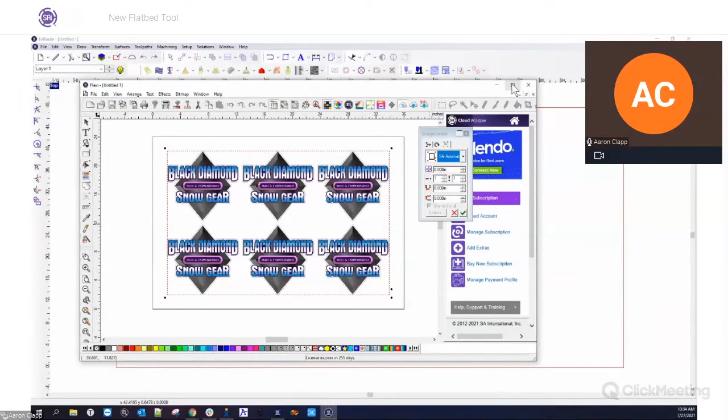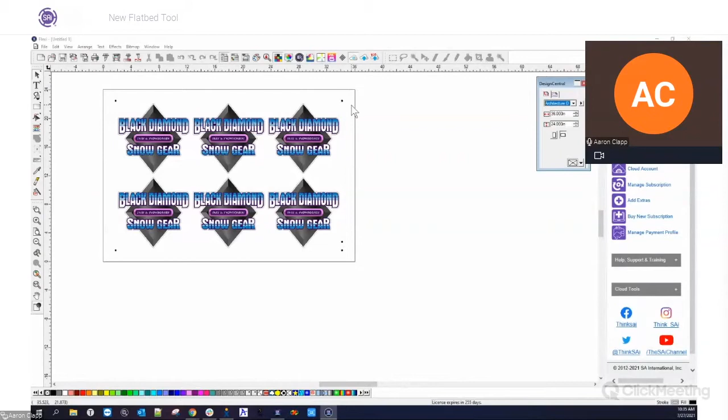Okay, so basically what we're going to start with is I'm actually going to open up Flexi just to give a perspective of what the file is going to look like before we import this in. Now, this doesn't have to be made inside of Flexi — it could be made in Illustrator, CorelDRAW, or any other application that has the ability to apply registration marks or circles or whatever. So basically the premise here is that I've imported a job, a basic sign, nothing special. It's all vector, and what we've done here is create a contour cut around it, indicated by this gray line here.

So I'm going to print this out, and then it's going to go to cut, and I'm going to cut this on my machine. The cut line is basically going to be this gray line here. And then what I've done is I've added some registration marks.

Now in Flexi, you have the ability to create automatic registration marks, little circles. This is a great way to do this. You do not have to have this particular tool. You could just be in Illustrator and draw circles. Just as long as they're a consistent diameter, we are good.

So for example, if you want to make them 0.25 inches, 0.5 inches, whatever you want them to be, the base amount is you need to have at least 3 registration marks. Minimum is on the perimeter, and then if you want to intersperse them throughout the design, that would be perfectly fine.

In fact, let's take a look at EnRoute real quick, and we'll just import a job that has a lot of them. So this particular job here has these sets of marks here, here, and here, but then it also has individual marks all throughout the file. So this is kind of up to you as to how many you need or want, but at least 3 is the minimum for this kind of workflow.

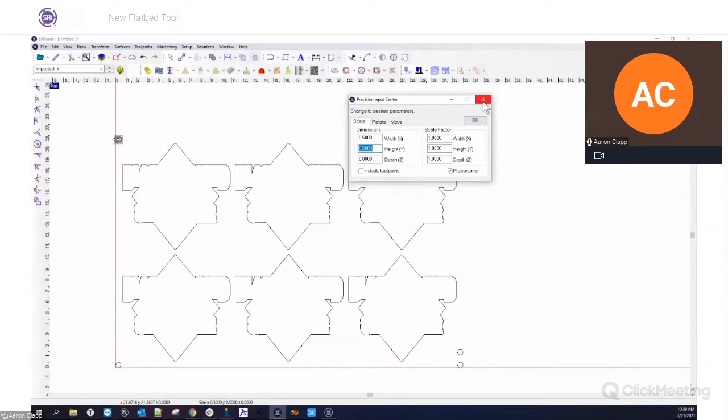And I'm just going to take note of my fiducial size. So here in this case, our fiducial size is 0.5 inches in diameter. So we're good there. I'm going to go ahead and close that. I'm going to select everything, and I'm going to go to Transform, Distort, and Flatbed Distortion.

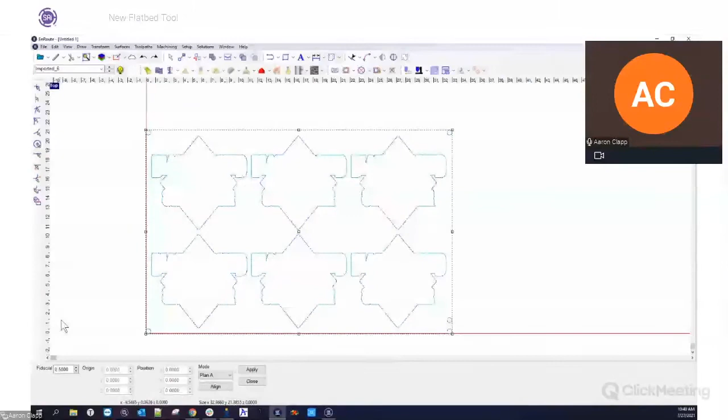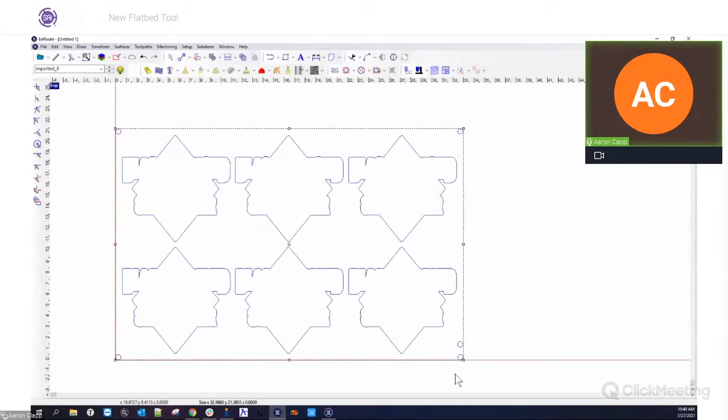Okay, so let's just make sure that our settings are right here. So we set our settings at 0.5, and it should recognize these holes, and for some reason it's not. Let's grab this real quick and delete it, and we'll just re-import the file here.

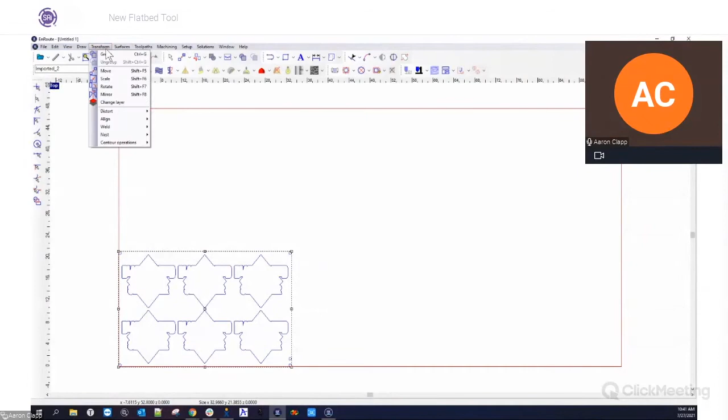All right, distort, flatbed distortion. Okay, and for some reason it's not giving me... let's move our part away from the edge here.

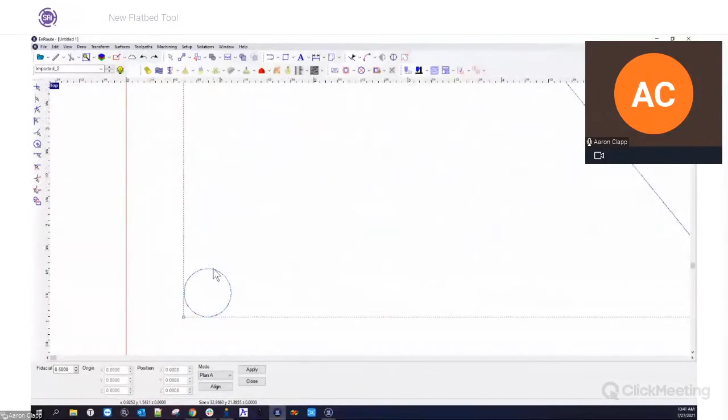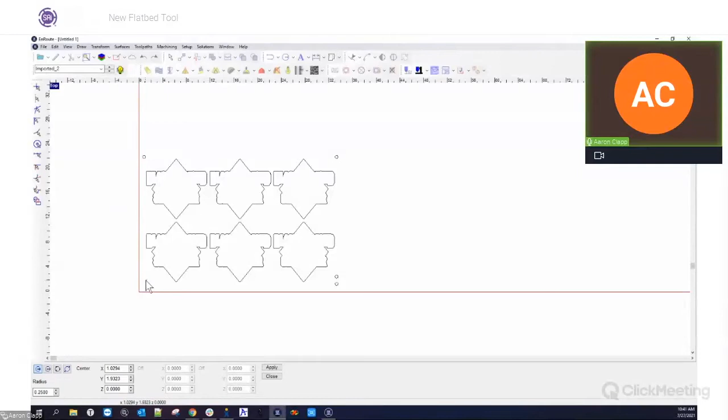So basically what it should do is give us fiducials right here. Now, I might have done something here. So for the sake of our demonstration, I'm just going to replace these. For some reason this file was working earlier, and now all of a sudden it's not. So just to make things simple here, we're just going to replace these just for the purposes of our demonstration today.

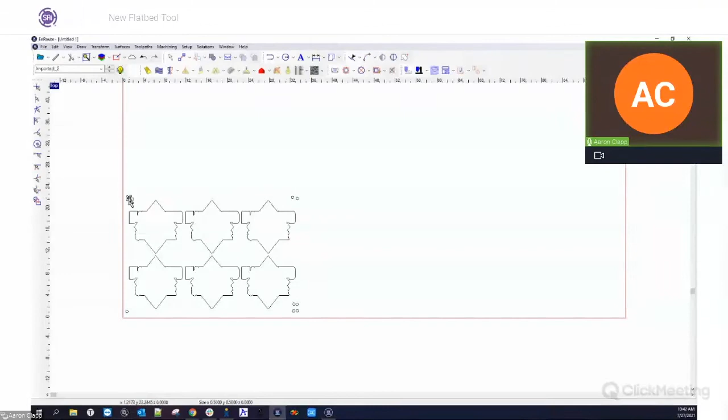And again, the placement of these is not necessarily super important when you first create the file, as long as they are brought over. In this case, I don't know why these holes aren't being recognized like they were before, but now they aren't. It's probably I need to restart my EnRoute, but okay, we'll just do that for now. So let's see if this should work. Okay, there we go. I don't know what the issue was there, I'll have to check into that.

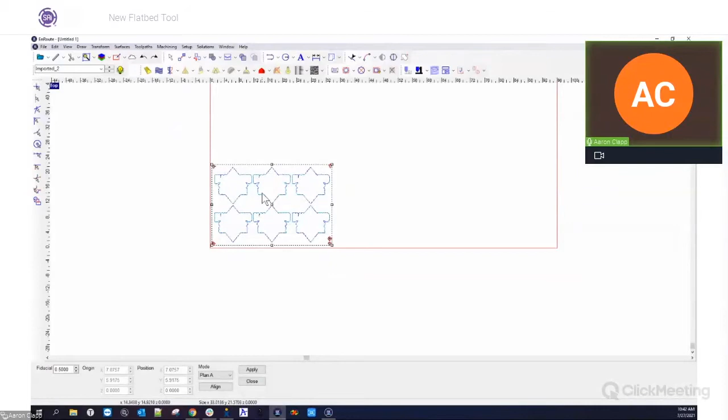But so this is the way it was importing earlier. And when I grab the flatbed tool, it automatically recognizes my fiducials at half inch, and you get this little icon here. So basically this is indicating that it's targeted onto these holes, and it recognizes these as my fiducial marks.

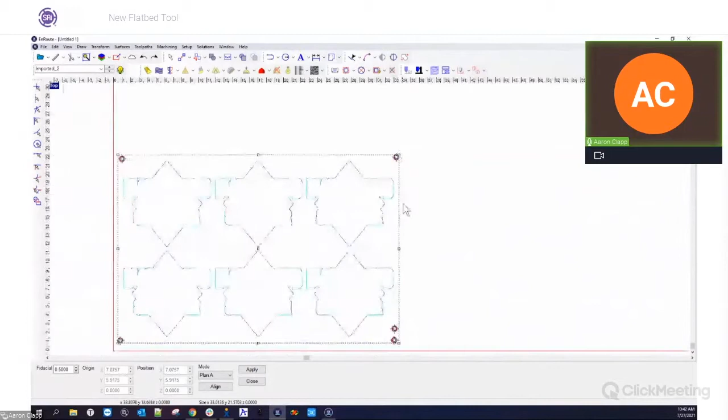Now what I'm going to do is down here, obviously I can set my fiducial size, and I'm going to be able to change my position. So what I'm going to do now is take this and compare it with what's on my bed. I'm going to move these around and get the coordinates of each one of these fiducial marks, or a couple of them, in order to generate a distortion pattern so that it matches exactly, just in case something is twisted on the table, or maybe the material is not set on there correctly.

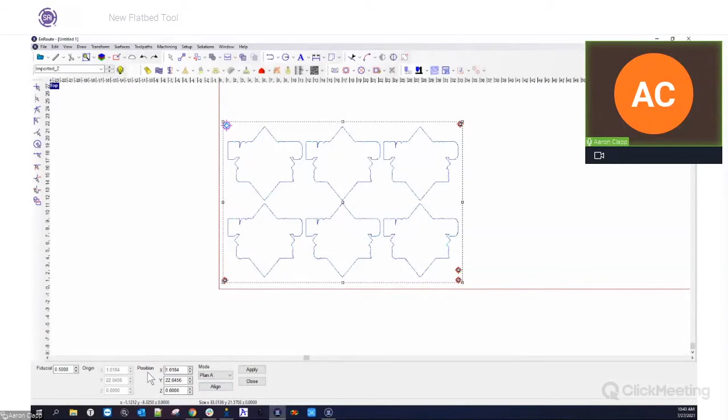What I'm going to do is click and select one of these registration marks, and then I can manually type in the position, or I can move the position around. So let's just grab one of these and move it. And as I move it, you can see that it's distorting the pattern already, moving this position around. So based on the fact that this is now here, it's making the adjustments for me that are necessary in order for that to work.

So again, if I change this and we adjust it as well, you can kind of see how this is all changing to adjust the entire file to make sure that it's correct based on the positioning of your machine.

Now you also have a couple different modes here. I don't have the specific details on the exact algorithm, but all these plans do the same thing. You get the same result, except it applies it a little bit differently in terms of the algorithm. So you can kind of see how some of these work and how they apply it - there's a little bit of a difference here.

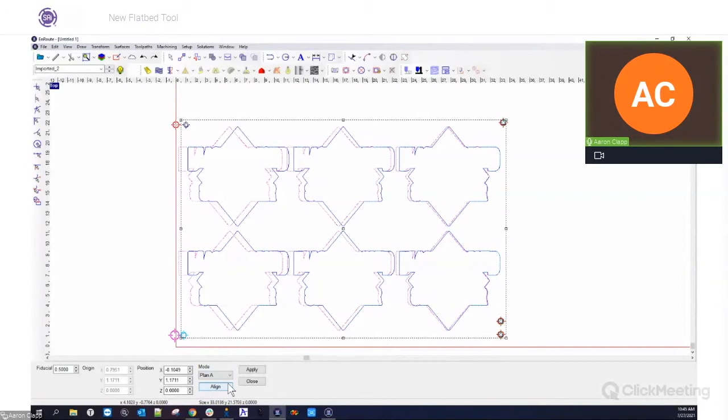Most of the time you're going to be using plan A, which is going to proportionally distort everything or move everything in a way that would make sense. Some of these other plans are more built for if you have some crazy distortion that goes in a very strange, odd way. But most of the time, what you're correcting for here is not a distorted print or anything like that - it's mostly just rotation and things like that. Because once you put it on the material, maybe it doesn't line up perfectly with the file and the way that it's set up in EnRoute.

Hardly ever does it do that, so you're always going to be off just a little bit. Even if you place the material just perfect, you might be off just a little bit. And that's what the camera systems are usually for, is to make adjustments for that kind of thing. So plan A will cover 90% of everything that you need to do for these rotations.

So I can hit align and then apply, and then it'll create new geometry for me. It keeps your original geometry there, so that you can go back to it if you need to. But since we don't need to, we can then just remove the old geometry.

Now I have my new corrected geometry, and I can toolpath these. So this is where I'm going to select my objects. I'm going to go ahead and apply my tool, whatever that looks like. That might be a knife tool or something like that. So let's just say we're going to use an end mill.

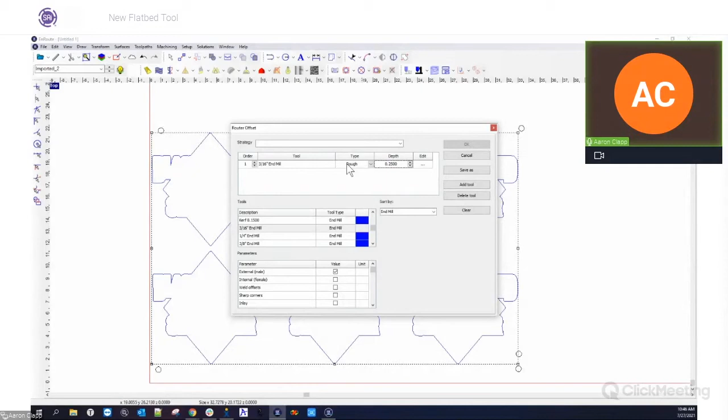And then we would put in our fiducial mark. So whatever tool your machine requires in order to recognize fiducials, or however your machine works in that regard, you want to put those there. So now your orientation is all set correctly. Now we can export this, send it to a G-code file, and you can send it to any machine.

So this is the adjustments that it makes. And again, it's one of those things where every file is going to need some adjustment, especially when you're doing this kind of thing. And this allows you to do that in-house or right inside the software before you send anything, so there's no camera system that's necessary.

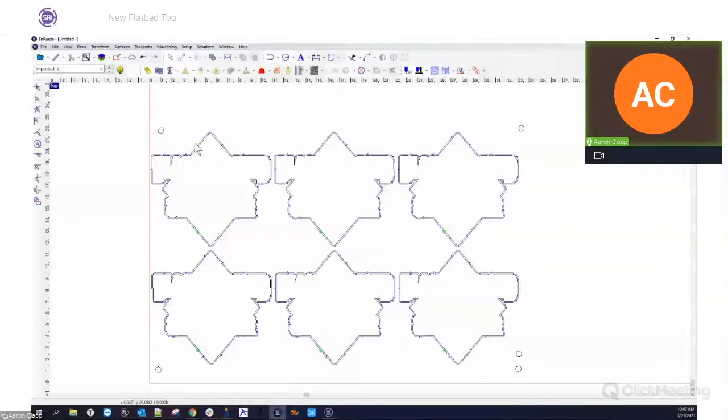So if you needed to cut these holes out, you could, but you don't necessarily have to toolpath them. You can now send this out as a corrected file to your machine, and you would want to put those based on your machine. So one of the things you'll need to do is make sure you get the XY coordinates of where those positions are. That's something you'll have to use on your machine to measure where the XY coordinates and the positions are going to be.

So as you do this, you're going to want to get as accurate a measurement as you possibly can. This is where you're not going to necessarily do what I did and just kind of freestyle it. You're going to need to get the exact XY coordinate, whether you move the head of the machine to the position or however you can find that location. Usually that'll be something you would do with the bit in the machine. You grab those coordinates, and you'll want to put in very specific coordinates here so that you get as accurate as possible.

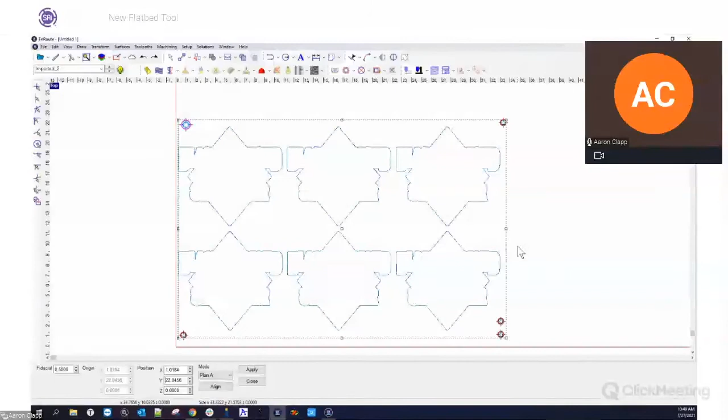So again, not something for production necessarily, but a very helpful tool for those who want to get into this, but don't necessarily need to spend the money on it all the time because they're not doing it frequently. A really powerful tool, something that has been requested for a really long time in the industry, is being able to do this without having to purchase expensive equipment.

Because some machines don't even support camera systems, and that is part of it as well. So this kind of helps solve that problem, making sure you get an accurate cut so that you don't have to build in really large amounts of bleed and things like that, and you can get accurate cuts for most of your files.

So that is the new Flatbed tool. We think it's going to be a really powerful tool for people to use and kind of start into this, especially gives them a little bit of flexibility so that if a customer does show up and needs something like this cut, pretty much anybody could do it at this point. That way they don't have to say, no, I can't do that, I don't have the equipment to do it, sorry, send them away. This way you can at least cut these jobs, do something like this, and it gives you a little more flexibility in the customers that you can reach and the types of jobs that you can do.

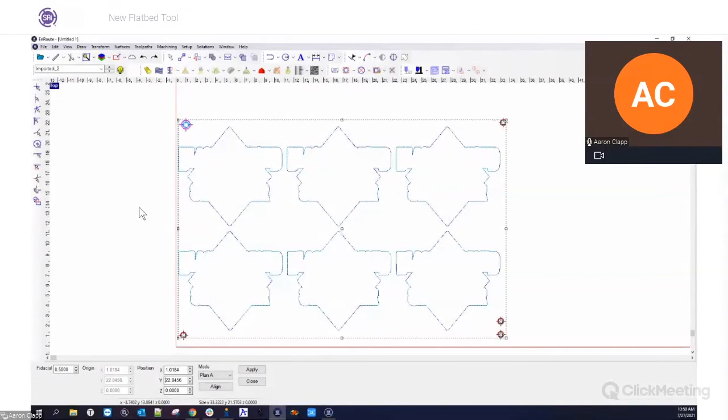Use your machine for more than just cutting out other objects and things like that. So cabinets or whatever it is that you do, this gives you a little bit of flexibility. And again, just to go over that, the fiducial sizes, all they need to be is a consistent size.

And at least 3 fiducials in the job. Typically, multicam with their vision system, they have a couple in the bottom like this, and then they'll have a couple spread out. Like I said, in this job I did 5, but 3 is the minimum.

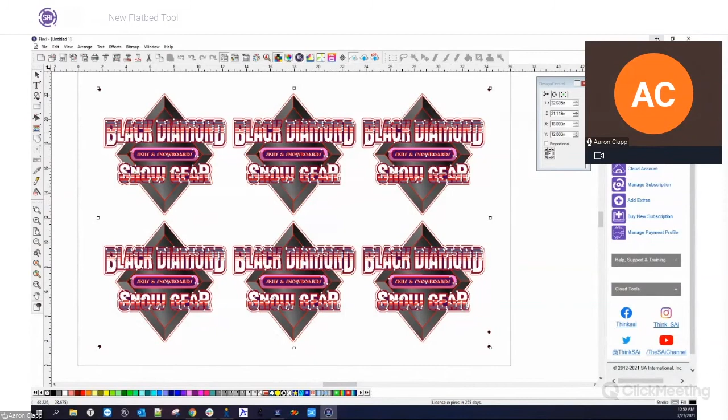That you can use. So setting up those files again in Flexi is really easy. What I would recommend that you do is, like in this file here, let's open up a new document here.

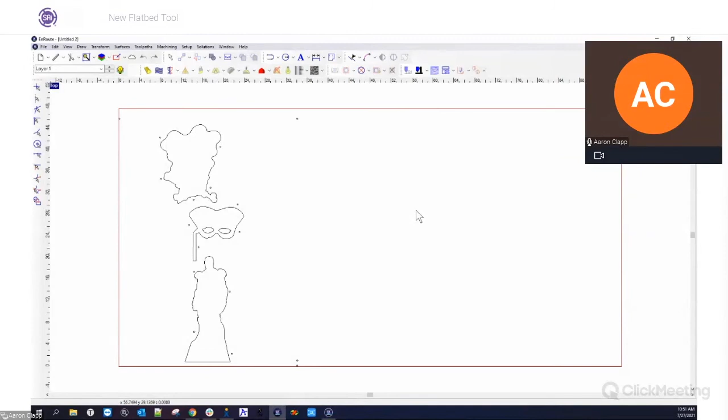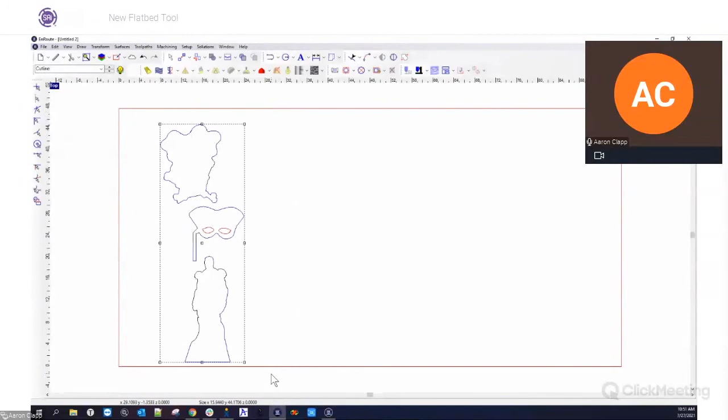The one that I previously had opened, a more complicated file, is actually set up in layers. So if I go here, my fiducials and whatnot are all set up in layers. Setting up in layers kind of makes sense, because then I can come back in here and go into my outline.

And then I can just grab this and toolpath it without having to worry about the circles and things like that. Last thing is, you typically want to do this before you add the toolpathing. Make sure and adjust the geometry before adding toolpaths. This doesn't really work once you add the toolpaths, because the toolpaths sometimes don't get adjusted properly. So make the adjustments first, then add your toolpathing, and then output, and you should be good to go.

If there's any questions about this, let us know. Or if you have any other questions about EnRoute 7 in general, this is a new tool for EnRoute 7. So if you have EnRoute 6 and you're interested in the new 7, there's a lot of new stuff going on, like 64-bit and a bunch of other new features. I would highly recommend checking out the new version if you have a chance.

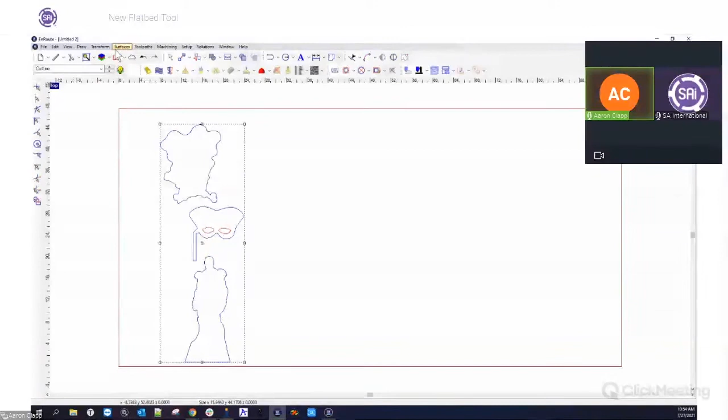If you decide to do the drag knife, you're simply going to just use an engrave toolpath. So you'll go into specialty tools and then hit engrave, and that'll send the toolpath right down the middle of the line. Now, if you're using an end mill or some other kind of tool, then you would just use a router offset, and that'll automatically offset it the correct distance so that you have the correct cut there.

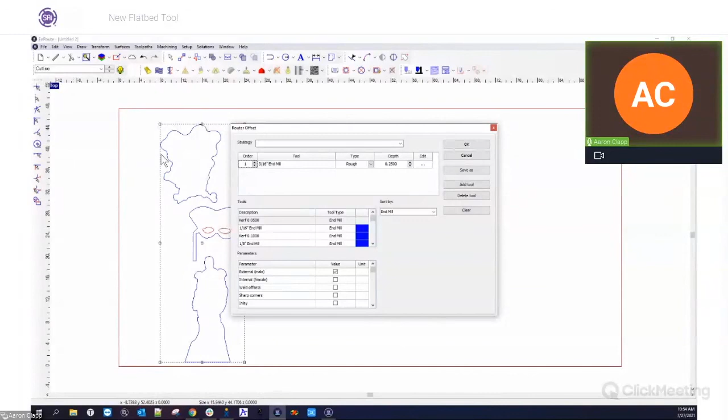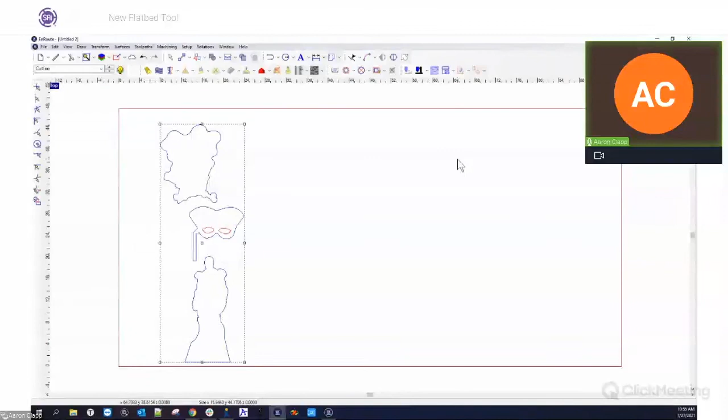So it can be used with both. It kind of depends on what kind of application you're using. Typically for cardboard or paperboard or something super thin that a knife can cut through, a knife would work great. If it's going to be something more like acrylic that a knife really can't cut through, then you'd probably use an end mill or some other kind of tool to cut out that perimeter cut. So good question - any kind of tool really would work.